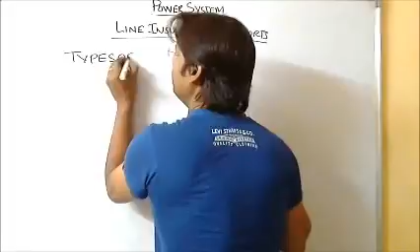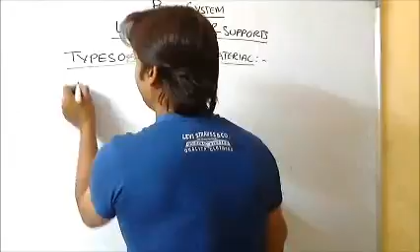Now coming to the type of the materials of the insulators. The types of the insulator material. One normal material which everybody knows almost is called the porcelain.

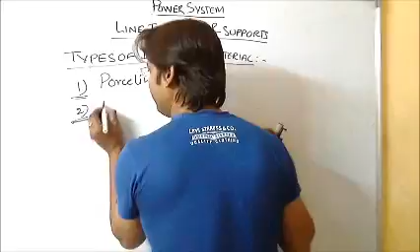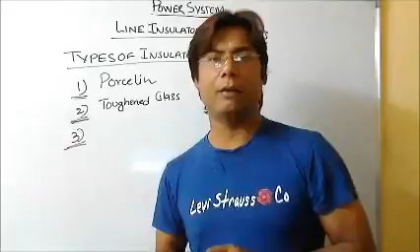Second, which is used, is called as the toughened glass. Now, one more, General Electric have discovered, which is called as Ge Pol. The General Electric company has discovered it. GE is for that, and POL is for the polymer. It is named as Ge Pol, which is better than these two.

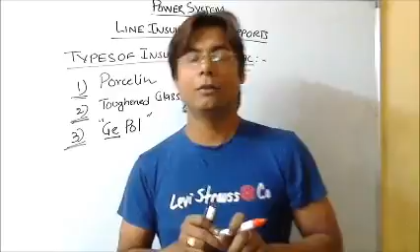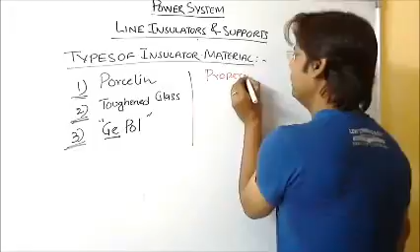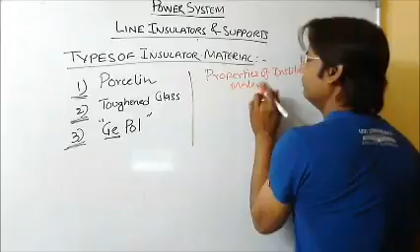Since I said that these are better than these two, we should actually understand, we should know the properties of the insulator material. What are the properties of insulator material? The insulator material should have the high puncture strength.

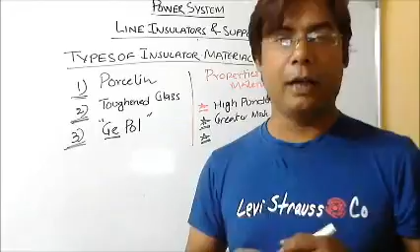Second, very much good property of this is that it should have higher or greater mechanical strength. The third very important property is the thermal shock resistance should be high. So the important property is high thermal shock resistance.

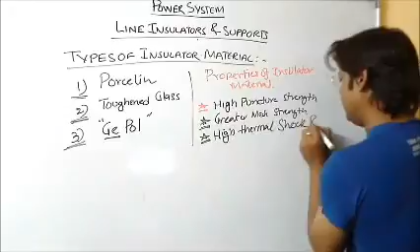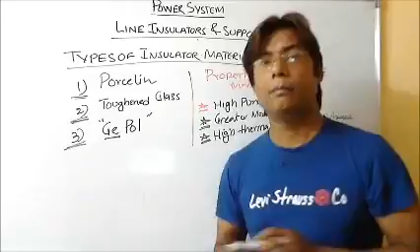So these are the properties of the insulator material: the puncture strength should be high, the mechanical strength should be high, higher thermal shock resistance it should have, and the material which is actually being used as an insulator should be free from impurities. So that is also one of the important properties about the insulator material.

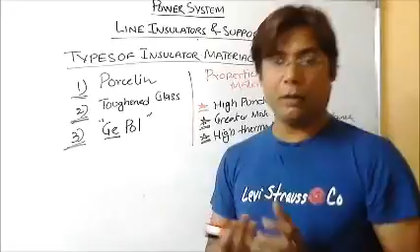Now coming to very important thing in this chapter, which is called the voltage distribution and the string efficiency.

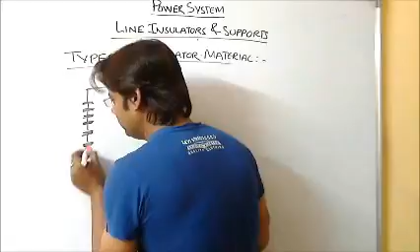Suppose this is an insulator, it's a string type insulator, and the conductor which is going into the board right now, like this, is connected to this string.

So what happens when a conductor carries a voltage? There is a difference in voltage in the string, and the voltage distribution among the total string is not equal because of the capacitance of the material, of the string actually.

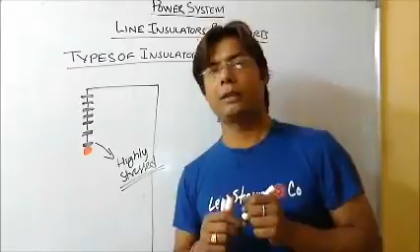So the disc which is nearer to the conductor is highly stressed, approximately almost equal to its flashover voltage. And if a flashover is happening in this, the whole string will be having the flashover. You will have to see the flashover.

And this string, which is the farthest from the conductor, is less stressed, not stressed at all, because of the voltage distribution. So the voltage is maximum over here, then minimum, then minimum, then minimum, then when it is lowest here. So the voltage actually increases like this in a string, in a suspension type of insulator.

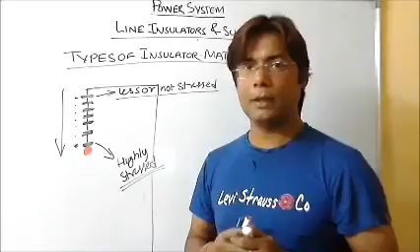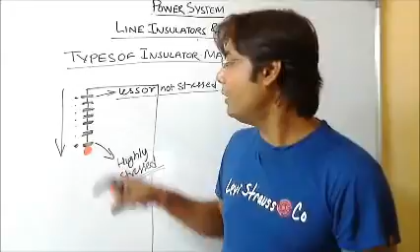So we need to have the voltage distribution first of all, such that the voltage distribution should be equal among all the discs, so that not only one disc is highly stressed, all the discs carry the same load. And if the load of the voltage distribution, the stress, is distributed among this whole string, then there will not be any fault condition in the total string.

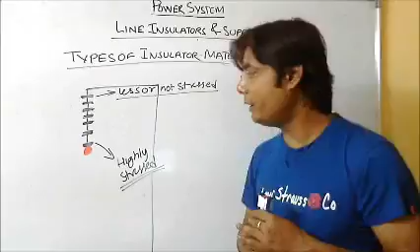So we should have a voltage distribution in this string. Since we have seen that the total string is highly stressed, and the disc which is nearer to the conductor carrying the current is highly stressed, while this one is the least stressed, we should be having a figure of merit kind of thing, called the string efficiency.

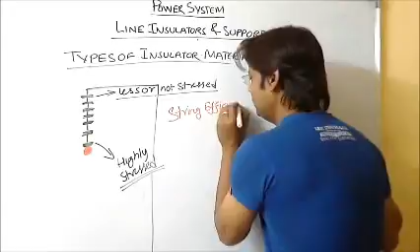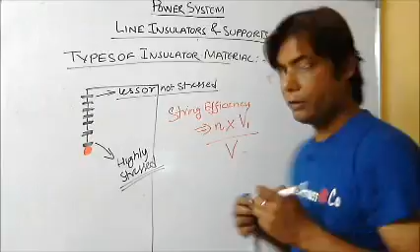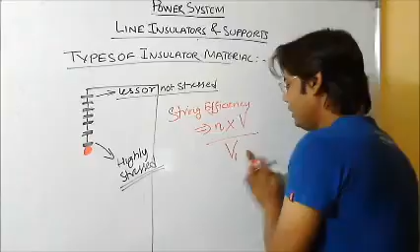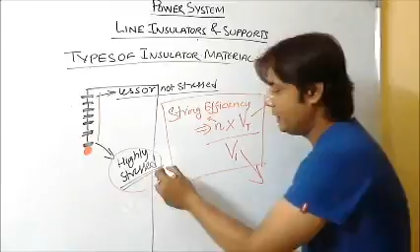So the string efficiency N is equals to N into V1 upon V. Here the voltage V, I can say the total voltage, Vt, upon V1. So the string efficiency is defined as N into Vt upon V1, where N is the total number of discs, Vt is the total voltage across the string, and V1 is the voltage across the highly stressed disc.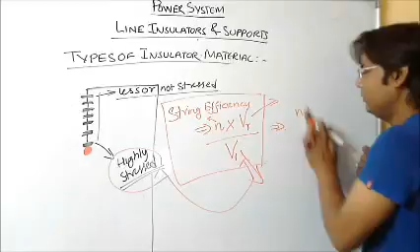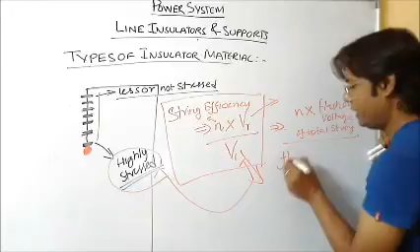This also can be written as N into the flashover voltage of the total string, divided by the flashover voltage of the disc nearer to the conductor. It means, again, we are talking about the disc which is nearest to the conductor right now.

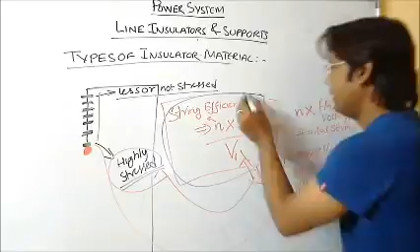So these are the two very much important formulas, one for the string efficiency. So we must learn behind these formulas, so that one should be able to solve some numerical problems on this.

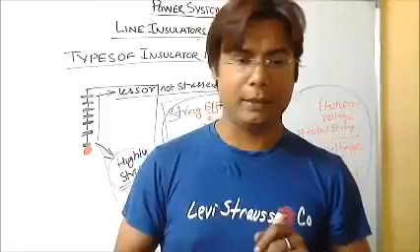So now coming to one more important point in this string efficiency. The string efficiency clearly decreases as the number of units increases. This N is coming here, N into V1 upon Vt, and here it is N into flashover. So we can say that the string efficiency decreases as the number of discs increases, V upon NV1 or NV.

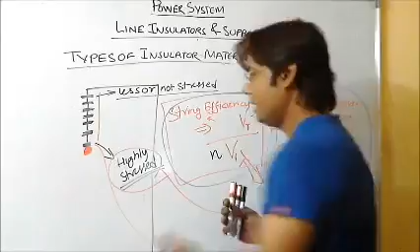So this was the string efficiency, but we have till now not talked about the improvement in the voltage distribution. So how to increase the voltage distribution?

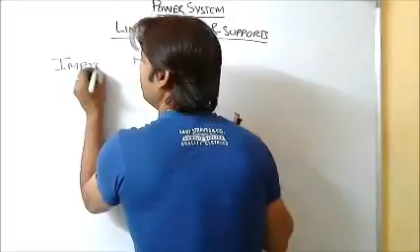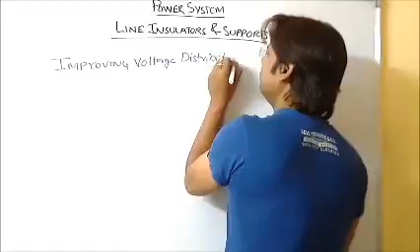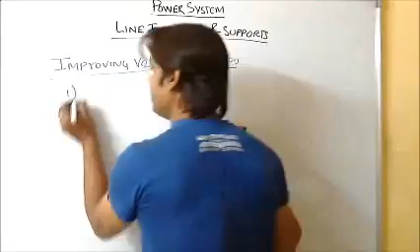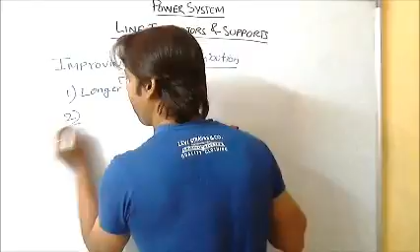How can we improve the voltage distribution? The first way is a very normal way of increasing the voltage distribution, by using a longer cross arm. Second is by capacitance grading. And third is by using guard rings. These three things are actually done to improve the voltage distribution.

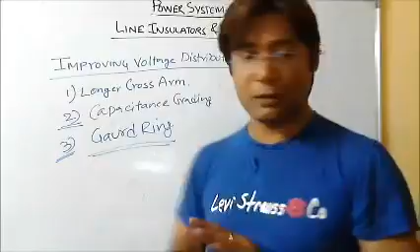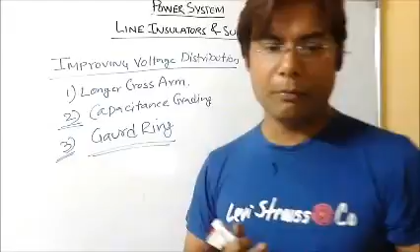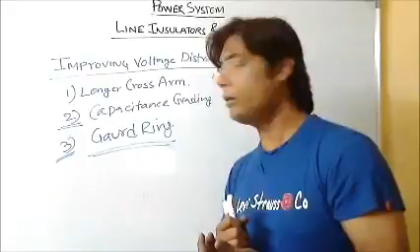In the longer cross arm method, the capacitance from the line and ground of each unit of the string is decreased. The potential distribution due to string capacitances from the line and ground to each unit of the string is improved, so by using the longer cross arm, we have an improvement in voltage distribution.

Here also, if the capacitance of the whole string is adjusted in a reverse order, so that the capacitance of the whole string is almost the same, the voltage distribution is also made the same. So we can have a better voltage distribution in case of capacitance grading also.

Third is the use of guard rings, which are actually placed below the conductor, below the insulator, such that it increases the line to line capacitance and decreases the string capacitances from line to earth. So the important thing is, when you use guard rings, it increases line to line capacitance and decreases line to earth capacitance.

This is a very important point regarding guard rings, please remember this: it decreases the stage capacitance to earth, making the voltage distribution uniform.

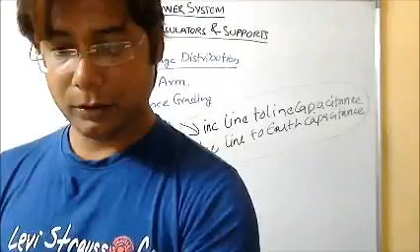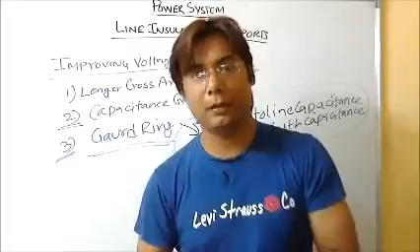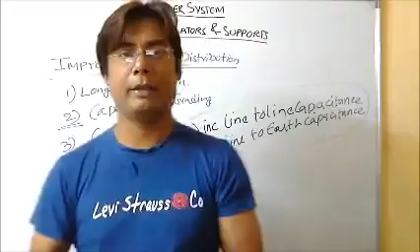One more thing which comes into the conductors or the line insulator is called vibration of the conductor. Vibration can be due to ice, vibration can be due to air, or self vibration also. So there are different types of vibrations happening in the line insulators.

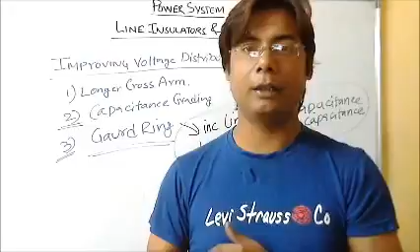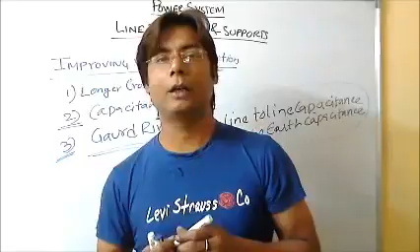One is called galloping, which is due to ice, and another is called dancing or sleet jump, which is actually due to when the ice is falling from the conductor. Then there is a very low frequency in the conductor, approximately 1 to 1.25 hertz.

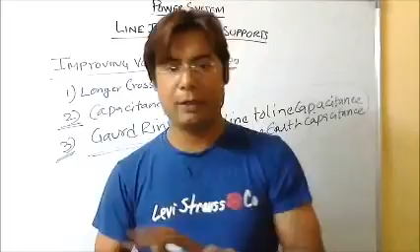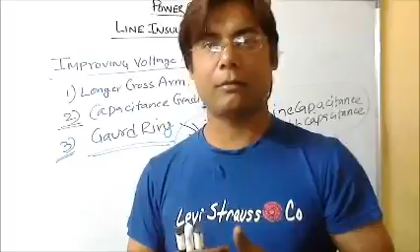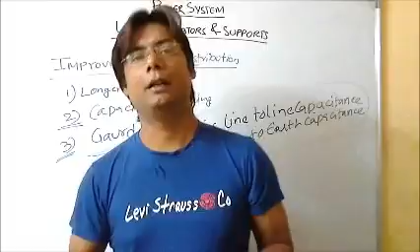That is a very low frequency on which the conductor actually dances, and we need the conductors not to be dancing, because the effects of vibrations are very serious. Sometimes if the vibrations are there, it may touch another conductor, and there is a flash in between - a line to line fault in between - and due to dancing, the conductor may break.

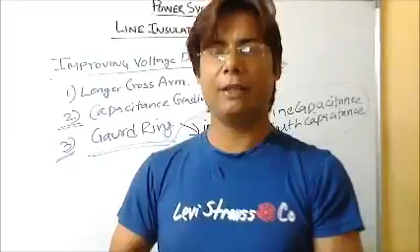So that is also not desirable. Apart from that, excessive sag will be there due to the dancing. These are the things which are not desirable in case of vibration of the conductor.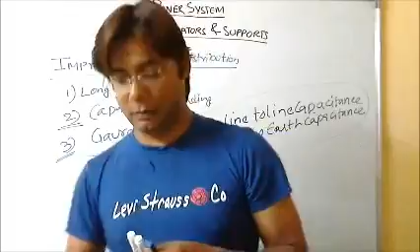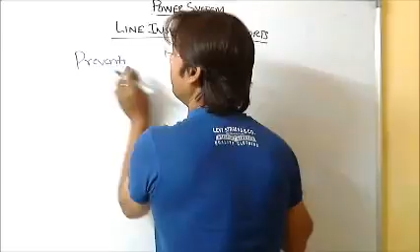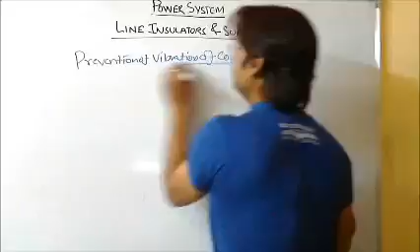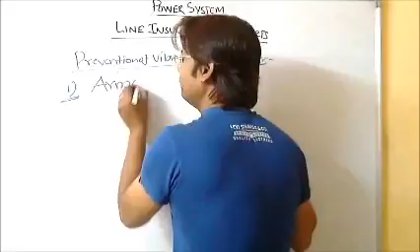So we need to do something to prevent the vibration of the conductor. One is called the armor rod, another is called the stock bridge dampers. Prevention of vibration of conductor is done by armor rods, as we said, and second by stock bridge dampers.

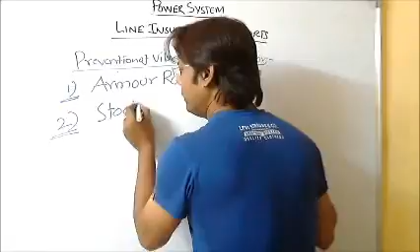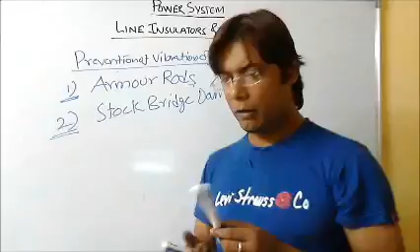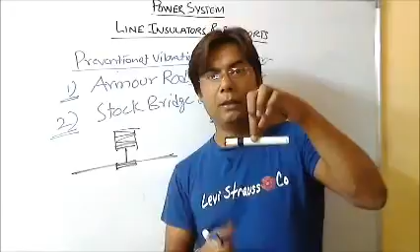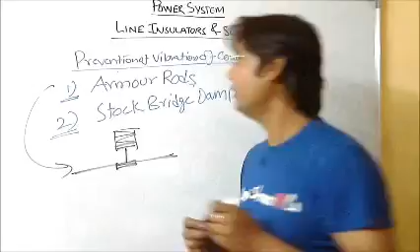Armor rods are placed such that, if this is the line I am having, the rods are actually holding this above the insulator, such that if this is the line which is going, and I am holding it like this from some insulator, there is less chance of dancing and less chance of vibration in this conductor. This is one way, called armor rods, which are placed actually on the conductor itself.

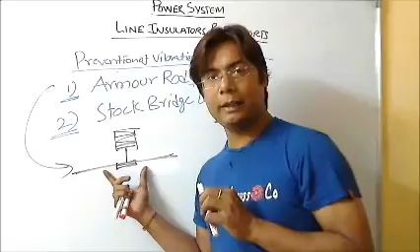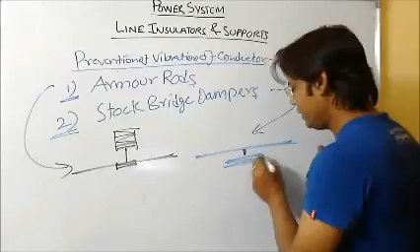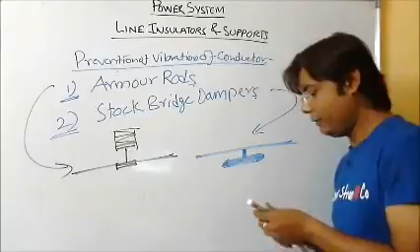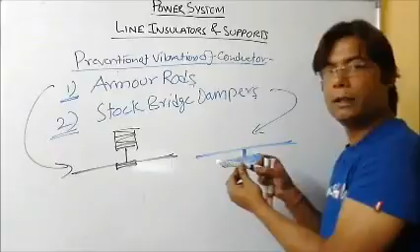There is one more thing called Stock Bridge dampers. Suppose this is my conductor going, I can have one very heavy metal rod connected over here, such that the weight of this metal is very high and heavy. So this is like hanging some load from my conductor, so there is less chance of dancing of this conductor, and there is prevention in the vibration.